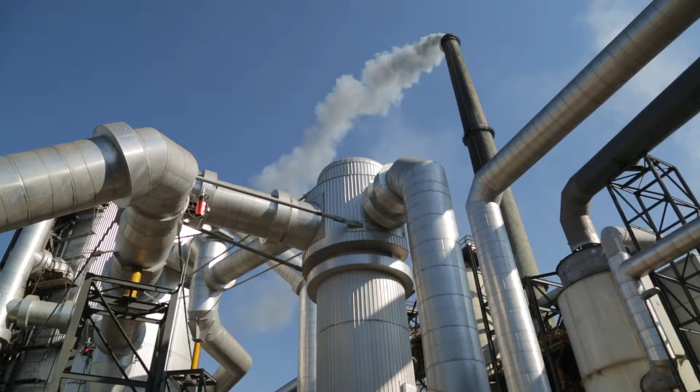There is an extensive network of industrial rail tracks within the port, and the whole existing complex is connected to the Serbian railway system and the international rail network. The Prahovo industrial complex is also connected by rail to the Bor smelting basin, a producer of cathodic copper and an important producer of sulfuric acid, a basic raw material for many branches of the chemical industry.

Prahovo is connected by about 50 kilometers of road to Vidin in Bulgaria and Calafat in Romania, both of which are important road and rail hubs on European Corridor 4. A 150-kilometer highway also connects it to European Corridor 10, which links Serbia to other European countries.

Prahovo International Port on the Danube is one of the key advantages of the site, as it provides the most efficient transportation to numerous markets.

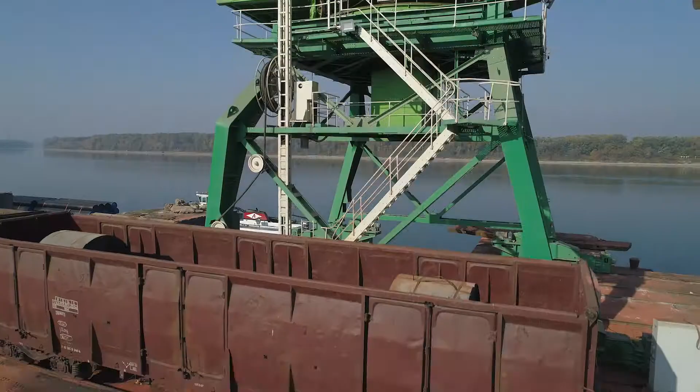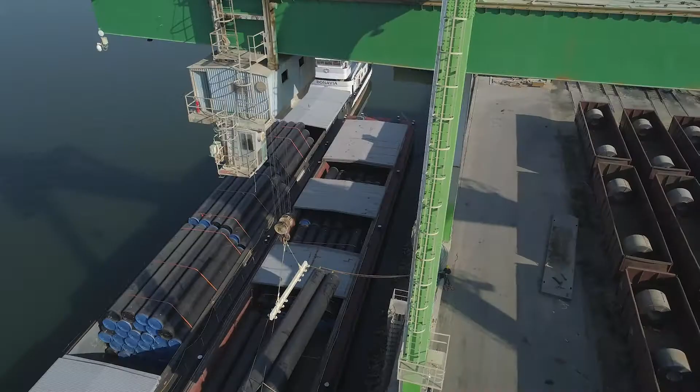Elixir Group is the operator of the port of Prahovo, which has 700 meters of operational quay, 7 berths for river vessels, and facilities for receiving and handling all types of cargo from river barges, rail trains, and transport trucks. The current transshipment capacity is about 2 million tons per year.

The development plan involves expanding the port area, increasing the annual transshipment capacity to 3.5 million tons, and building new closed and open warehouses in the port.

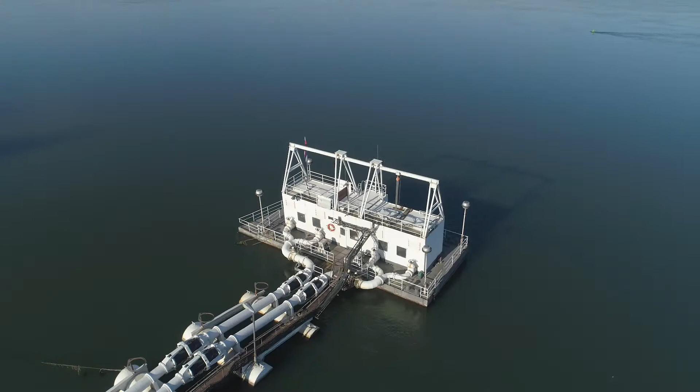Industrial water supply is provided through its own pumping station on the Danube, with a capacity of 4 times 650 cubic meters per hour.

Electrical supply is provided through a dedicated high-voltage transformer station with a total power of 2 times 31.5 megavolt amps. The system has dual power lines and is directly connected to the Đerdap 2 hydroelectric power plant.

Steam supply is through a system of insulated steam lines to each consumer. Current steam production is 55 tons per hour.

The development plan of the industrial complex in Prahovo covers a total area of 300 hectares, of which 115 hectares is intended for construction of an industrial chemical park comprising several technological units.

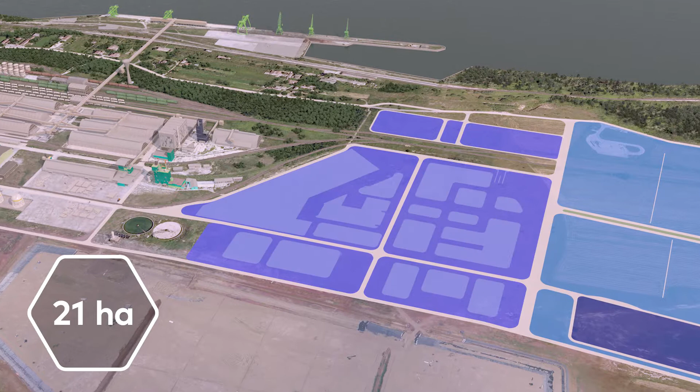The chemical park is intended for building new production facilities for the chemical industry. The industrial park is envisaged for the activities of other branches of industry. The energy island is intended for construction of infrastructure and energy capacity needed for the chemical park.

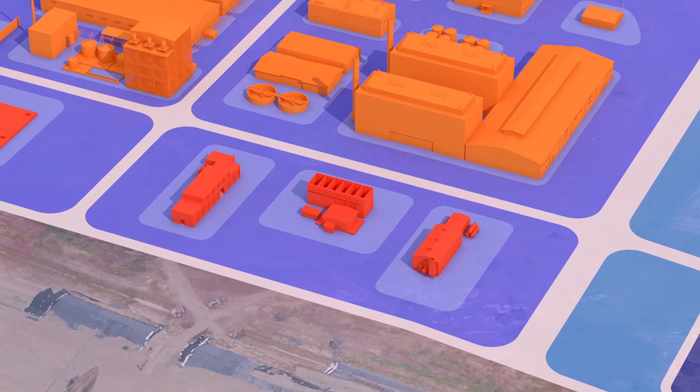Plant for pyrolysis of plastic waste. Incineration plant for solid and liquid industrial and non-recyclable waste with utilization of heat energy and new capacity for steam production. In addition, plant for demineralized process water, water cooling towers, compressed air center, warehouse and logistics center with rail and road terminal.

Central plant for final wastewater treatment after appropriate initial treatment at production sites, central administration building with shared facilities. Site infrastructure for production plants includes an internal traffic network, underground and above-ground corridors with all necessary installations.

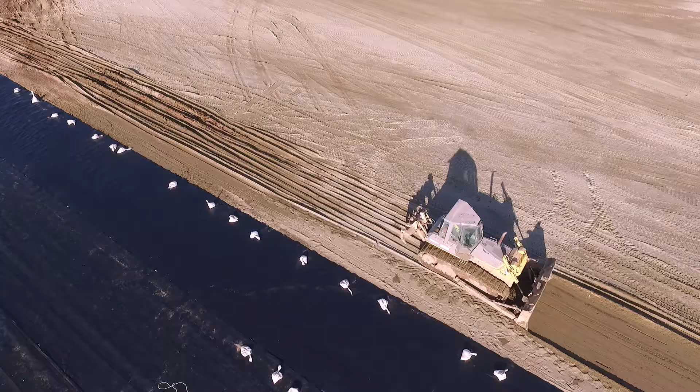The environment island of 10 hectares, as an important part of the waste management system, is intended for disposal of industrial waste residues from the plants.

Plans are in place for extension and long-term development of a modern storage area for phosphogypsum as a byproduct of phosphoric acid production. The configuration of the site allows for further development of production facilities and expansion of the industrial chemical park.

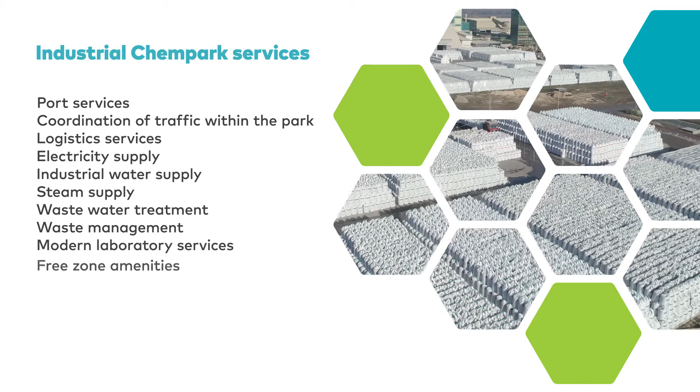The ultimate development goal of Prahovo Industrial Chempark is an effective logistics infrastructure and a complete range of the utilities which operators of developed chemical parks in Europe provide for their clients.

There is a range of advantages and benefits for investors in Prahovo Industrial Chempark: availability of raw materials, access to multiple markets, workforce and education, corporate profit tax, price of electricity, and incentives for foreign investors in Serbia.

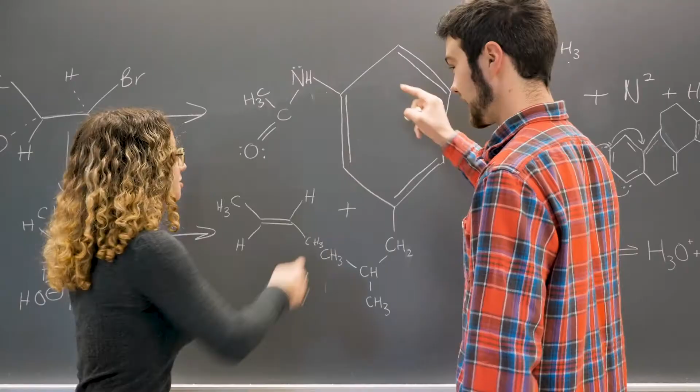The Elixir Group also focuses on the development of human resources through collaboration with all education institutions, scholarships, and setting up an education and training center. HR projects are aimed at motivating young people to seek career development in the chemical industry. The group also assists employees with housing and relocation.

One important HR project is the phased construction of Elixir Garden, a residential commercial development in an attractive location in Negotin. Among its other benefits, this will provide important support for further HR development as well as expansion of the activities of Prahovo Industrial Chempark.

Opportunities ahead.